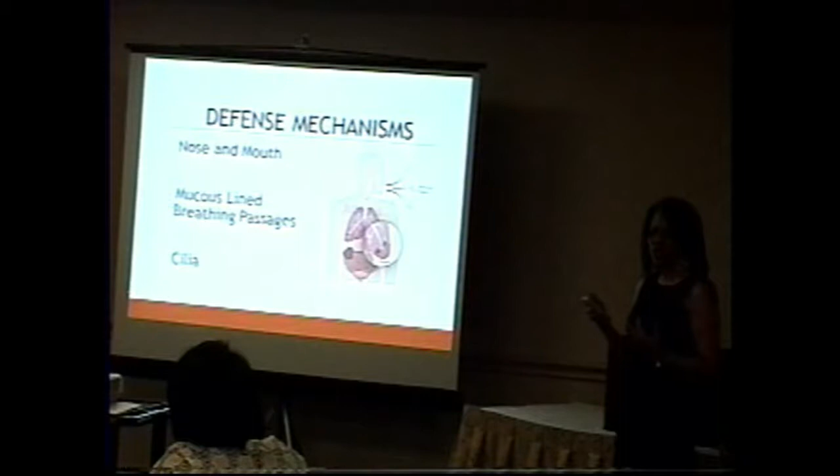Defense mechanism - what things are there in our bodies that protect us, what defense mechanisms do we have from asbestos? Our nose and mouth, the mucus lining the breathing passages. So the cilia in our body protect, but just think about it - when you're breathing and the fibers are very tiny, if you think about one strand of your hair, that's very small, isn't it? So you can't always see it, but if you're breathing it and it attacks your body, the different passages of cilia in your body can only protect up to a certain point.

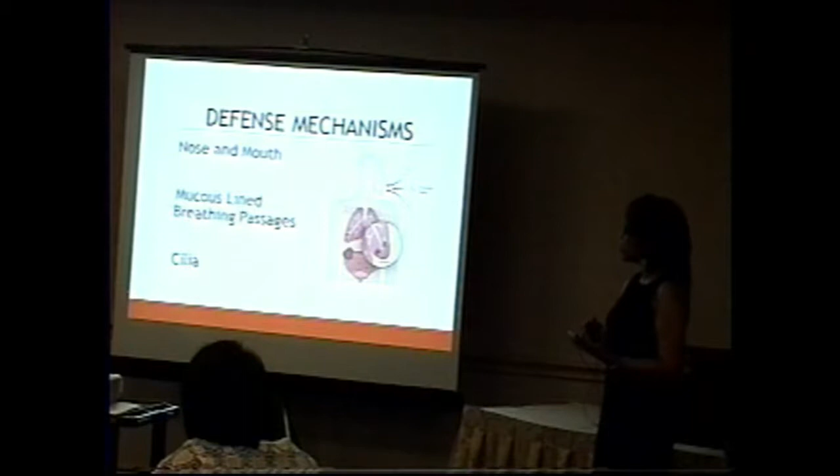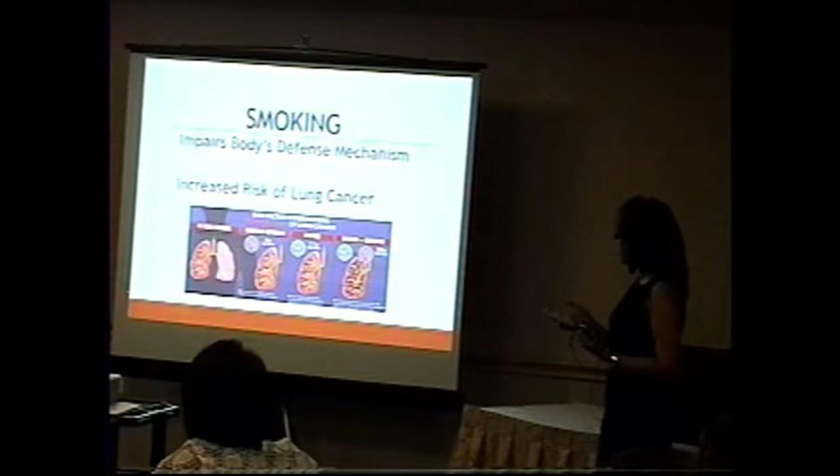When you breathe it, it affects that cilia, and sometimes it numbs it. So if it has that numbing effect, then it's not doing what it's supposed to do. We talked about smoking - it impairs your body's defense mechanism and increases the risk of lung cancer.

Suspect material - this is kind of geared from the contractor's perspective. If in your building you have not had an inspection conducted, which you should, the first thing you should do before you start any work is make sure that it is inspected, because you don't know what suspect materials might be present.

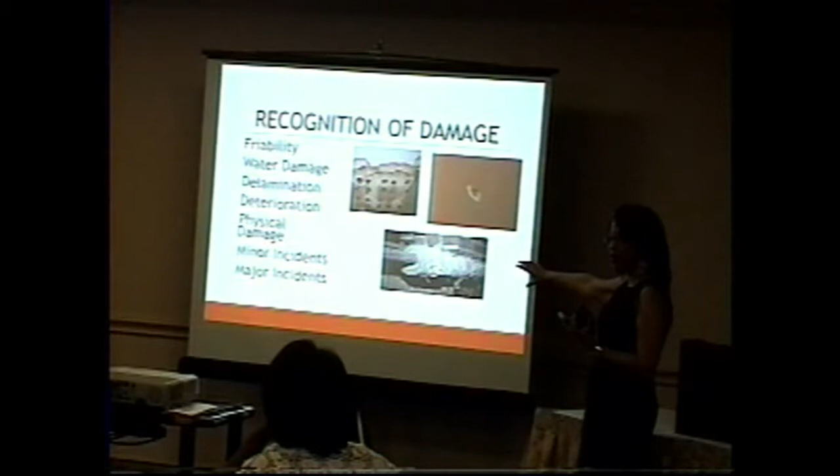Piping, this is another type of piping. When you see that insulation on that piping looking in this state, then if you touch it, what's going to happen? It's going to fall to the ground. You're making it friable. So remember, if your maintenance guys are coming in, or a handyman perhaps doing some type of job, you don't want to expose them, because you're exposing the workers, you're exposing yourself, you're exposing the children.

So friability is key. Water damage: if you have water damage on your floor tile, and I'm going to show you some other areas, any type of deterioration, physical damage, any incident, just be aware. 1978 is your target. So if you have a building, what's the age of your buildings? Is it older than 1978?

Oh, I'm thinking lead, aren't I? Yeah, I was just, I'm gonna say, thinking lead. Look, I'm thinking lead. You're right. You're right.

Basically what she's saying is there is no date after which you can assume that your building is asbestos free. That's what she was indicating. So even a building built in 2008 could, in all likelihood, still have asbestos products in it.

By the way, I am also a contact for asbestos. He is, and you know, Mr. Kelly is very knowledgeable and a wonderful source of information. Because even though he's in the lead division right now, he actually wears both hats. I think you wear all hats. So if there's a lead question, if there's an asbestos question, if there's a mold question, he is a wealth of knowledge.

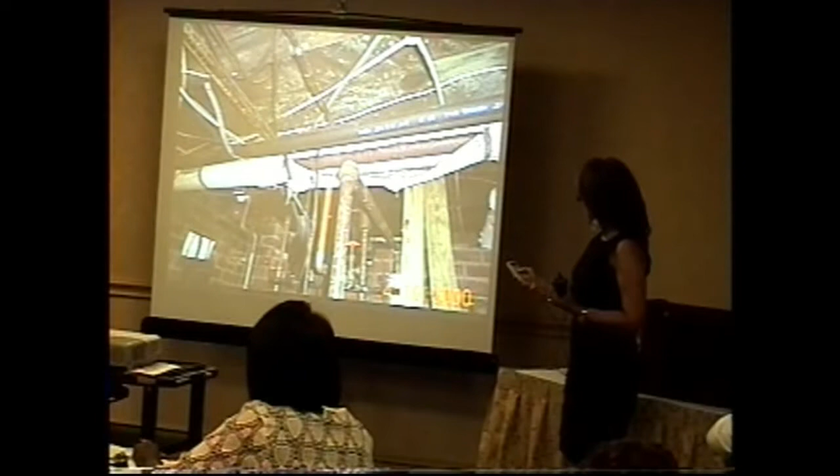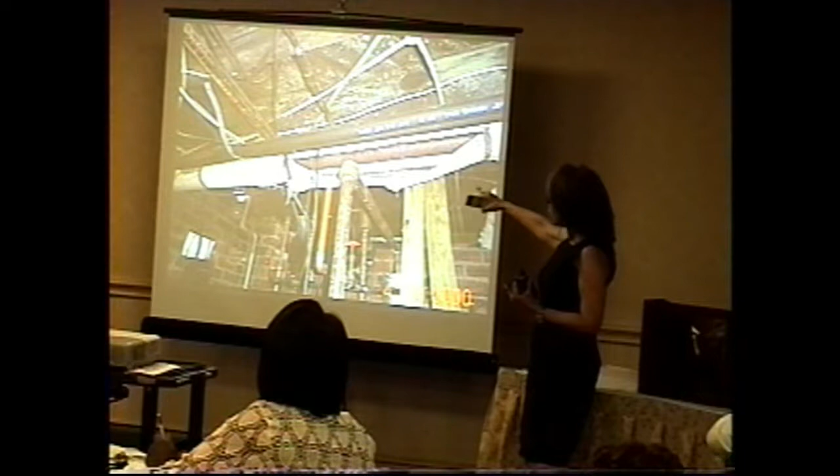This is a clearer picture of what I showed you earlier. Many times when the ceiling tile is there, there's glue. They added glue to make it stick so it doesn't come off, but over a period of time it will break. So usually, all of these pictures are suspect material. Again, another pipe, a metal pipe with a wrap. And many times if you see insulation, sometimes they may have foil on the back. That's a good indicator that it is asbestos as well.

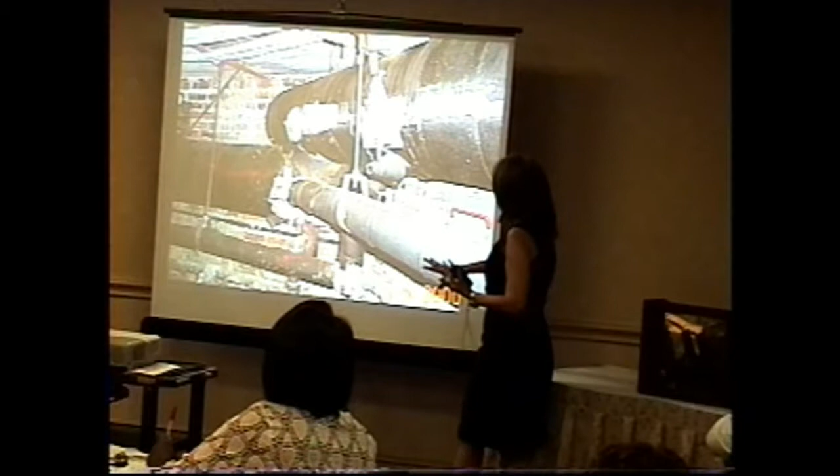Tanks, if you have like a boiler room, this is the pipe and this is the tank. Sometimes the coating on the exterior of those tanks contains asbestos. So if you decide at some point you want to have this removed, you want to take preventive measures.

And these are just different. Sometimes rubber, we see rubber. We think that rubber may not contain it, but sometimes the rubber is the exterior while inside is a different material that makes it up. This is another just insulation.

Floor tile. Do any of you have 9x9 floor tile? Do you have floor tile in your buildings? Probably you do, don't you? Either carpet, floor tile, or linoleum. Just concrete, any kind? Probably not because of the children. You want something else, okay.

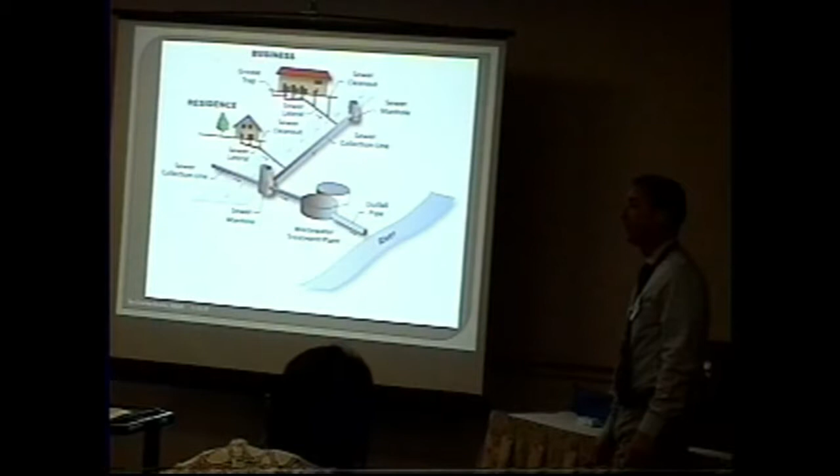If you hear the news, sometimes you can hear a lot of overflows and things like that. Some of that sewage does go untreated, millions of gallons sometimes.

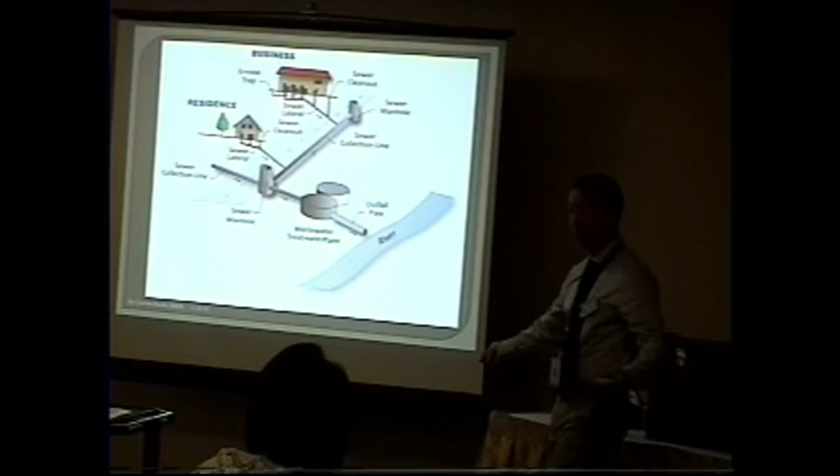If you have an individual on-site wastewater system, the treatment and disposal process is taking place on site. So if you think about all that, collection lines, manholes, treatment and disposal, that's all confined on your property if you're not on a centralized wastewater system. So there's a lot of things going on.

Just to give you an idea, this could be a house, a residence, a daycare, a little shop or retail store, whatever. Toilet, sink, bathroom, whatever, it's got to go through treatment, some type of collection. Everything comes out. A lot of folks get familiar with that clean out. It's very close to the property, at the back or on the side. And if you see that and some type of partition of a tank nearby, you probably have the on-site system, especially if you're not paying a sewer bill.

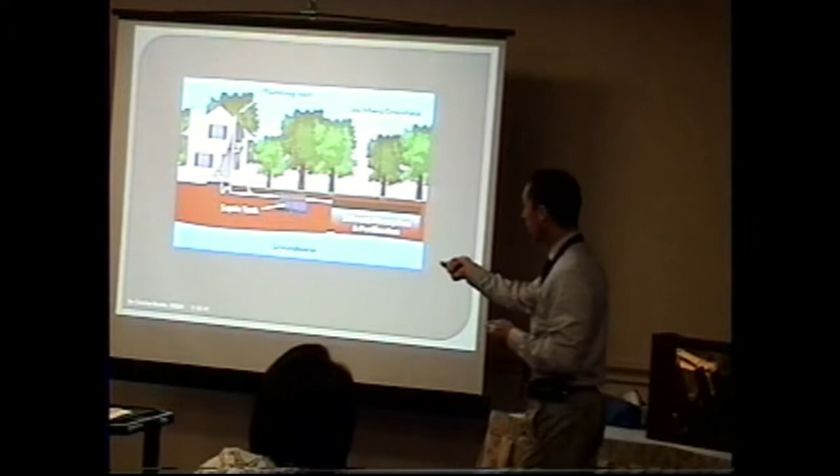So you've got to treat it and do something with it. That's the hard part. We can collect the wastewater all day long, let it do its thing, and then we've got to figure out what we're going to do with it. That's what the environmentalists do for the state of Mississippi. We study the soil and make these determinations, designing this based on design standards in our regulations. We don't just have a rule book and say you need a 1,000-gallon tank or whatever. We've got to figure that out on every site.

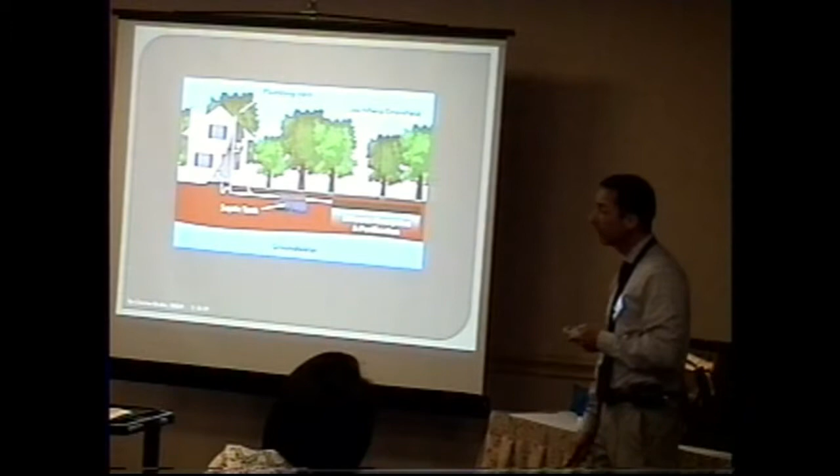That little pipe you see sticking up, what is it for? That's just a clean out. It serves a purpose for clearing anything that comes out, like tissue or grease, that builds up and accumulates over time. It's typically not right up close to the surface, it may not be as high, but it's usually a 4-inch pipe, sometimes 3-inch. You might see a 6-inch in some areas if it's larger.

All right, here's a question: what happens after we flush the toilet, take a shower, or wash clothes? It goes into the tank. It's got to do something, right? Out of sight, out of mind is a common attitude we have. I've lived in both situations, paid my sewer bill, and you don't think about it until you've got a problem. Well, the wastewater has to go somewhere, and my question is, where do you think that somewhere is?

Somewhere starts with treatment. The pictures I showed you, that's the definition of an on-site system. I'm going to talk about on-site systems from here on out. You've got a septic tank, or you've got a treatment system, an advanced treatment system. That's the term used in Mississippi. It's commonly referred to as an aerobic treatment unit or a treatment plant. You may have heard some of those terms before.

These are tanks buried in the ground that hold wastewater for treatment, typically installed within 5 to 10 feet from the dwelling or building. That little clean-out pipe is relatively close to the building, at the side or back. The tank should be very close within proximity of the building, like I said, 5 to 10 feet.

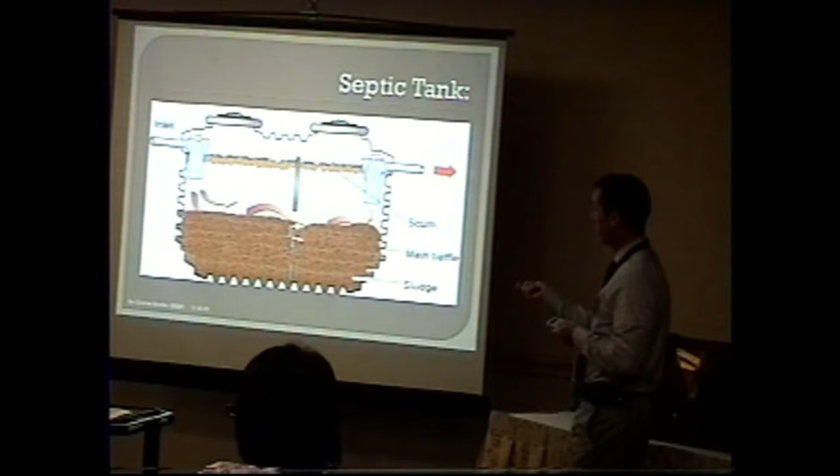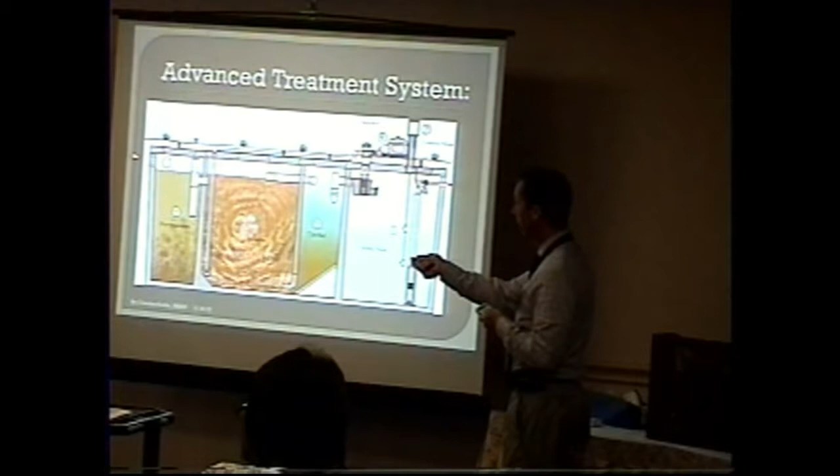An advanced treatment system, again, is an on-site system for treatment. You got a septic tank or you got an advanced treatment system. This is, if you notice, just basic, a lot of things going on here, as you can see. Pre-treatment, wastewater coming in, same principle, waste coming in, there's a side drawing. Waste coming in, pre-treatment, aeration zone, clarifier kind of settles it out.

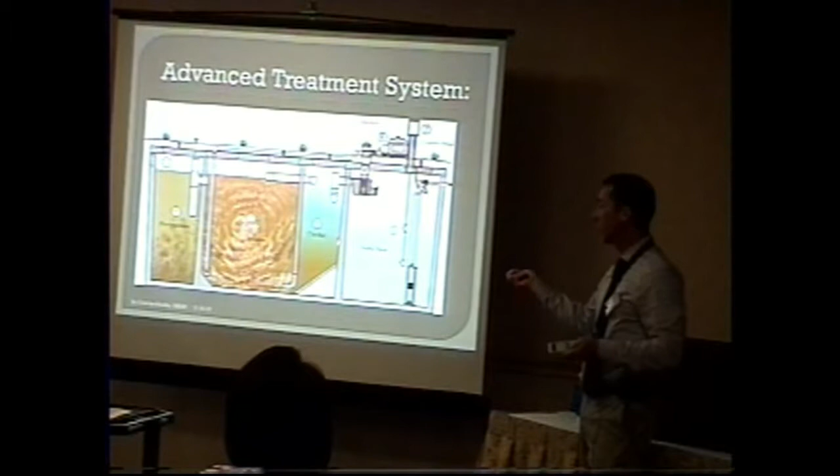You see how it's getting a little bit clearer and clearer? That's still got waste in it. You disinfect, you got a pump chamber, there's your aerator motor and your control panel. This has electricity. Anybody ever had kids with an aquarium at home with little fish and little stones with the air bubbles? Same concept, but a little bit more sophisticated. You're introducing air into that. You're speeding up the process.

That was treatment, okay? Again, we're dealing with an on-site wastewater system, that whole process. That's a very quick overview of treatment, septic tank or advanced treatment system. And I told you about where it's located at, within 5-10 feet of the house, by that clean out, and some of the processes that take place.

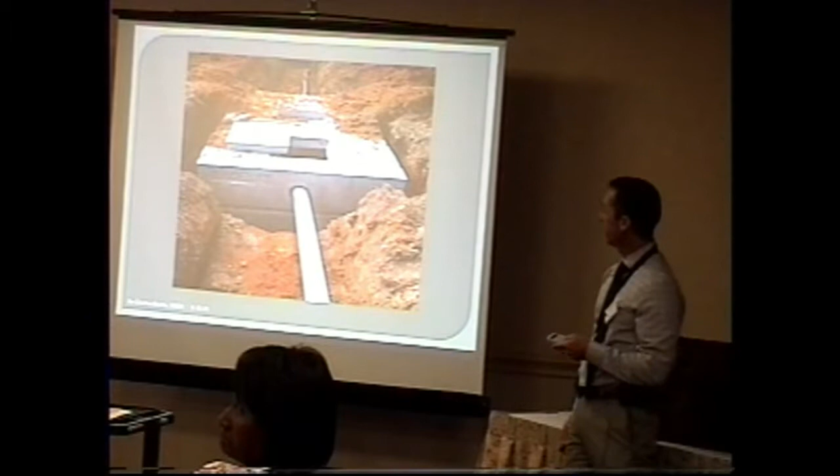There's a septic tank, a concrete one. That's typical—looks big once it's out, but there's one going in. This is just for a house or a trailer, waste going in, waste going out into the field line. This is one that has risers.

We just had a recent regulation change as of last November requiring risers, which may help identify the tank in the future since all these tanks are buried—you don't see anything, and there are a bunch of old ones. So now, since November of last year, a new rule requires that you can see this lid. It's got to be visible.

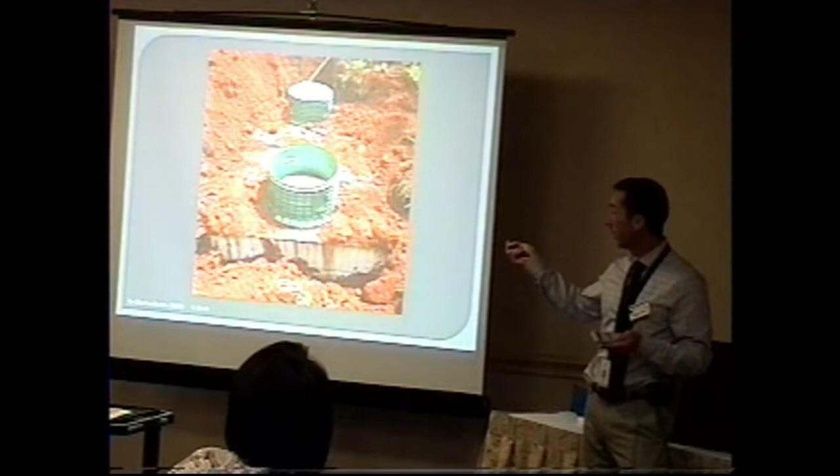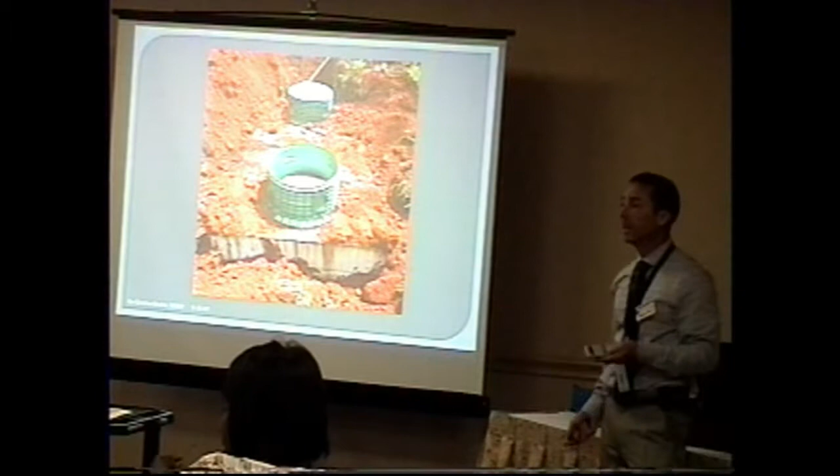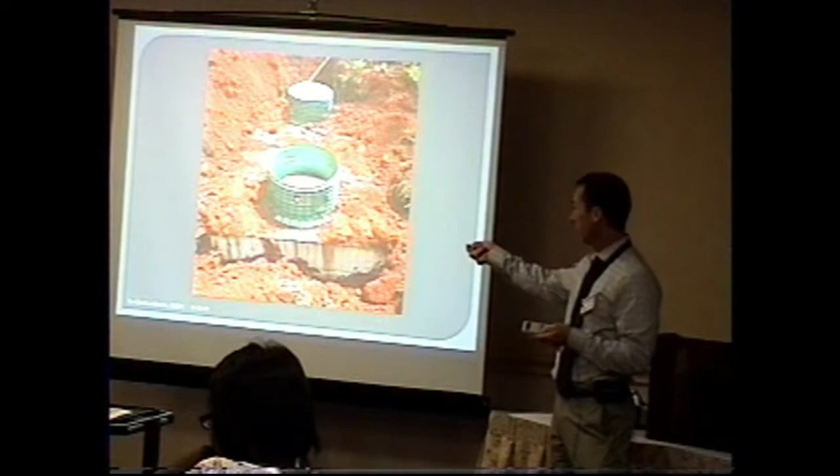Maintenance is an economic factor. We kicked around many different ideas with this, and we had an advisory council. The way it was described to us: if you have a septic tank at home and need it pumped out, if that guy has to go grab his shovel, he'll charge you about $40 on average to dig that little lid up 6 inches underground. That's why we wrote the rule, to get homeowners to know here's your system, have you had it pumped out, here's access to it. It makes sense because some of the openings are smaller and some people just don't do it because they don't have access to the unit.

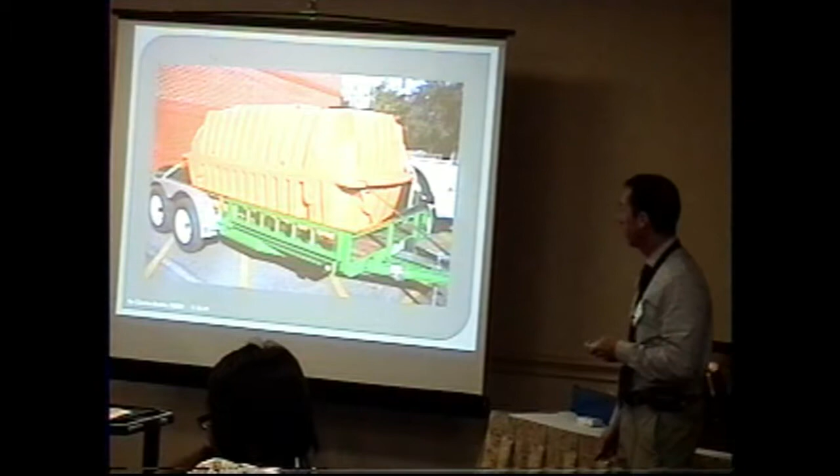Poly tanks come in different sizes and shapes. These are all registered products. We register all these. You can't just have a tank put in the ground. We tell you how big it's got to be, how to build it, and how to register and label it, the whole nine yards.

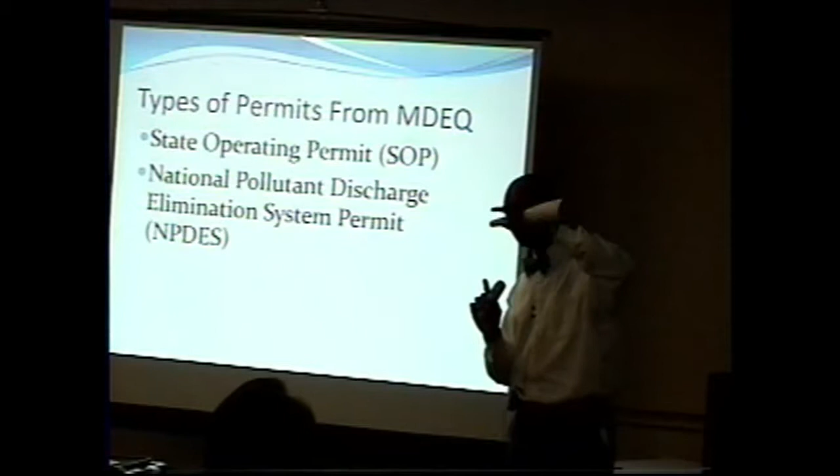The health department cannot help you in that case. The State Operating Permit, what we call SOP, can vary between the health department and us depending on the size, and depending on if the health department wants to take you on. So those are the two types of permits with DEQ that you'll basically see if you have to go through DEQ: the State Operating Permit, SOP, or the National Pollutant Discharge Elimination System Permit, NPDES.

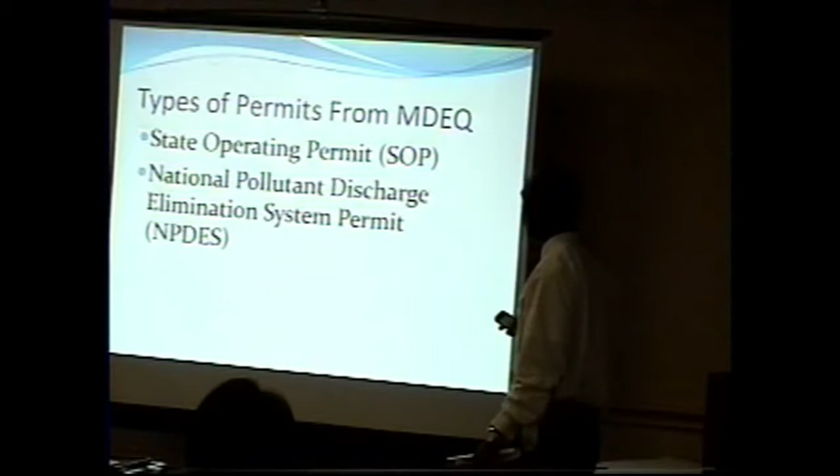Alright, basically we'll start with the State Operating Permit, or SOP. This is a non-discharging system into state waters - land application, like how Mr. Charles stated in the last presentation, discharging basically via the ground, via spray field drip system, or etc.

The ATU system, which is installed by a proper installer, also has to be checked. This is in the permit that you all will receive if you have to go through DEQ - it's basically the regulations, almost your Bible of what you have to do for your system. So it has to be checked by a certified wastewater operator, Class 2.

You have Class 1 to Class 4. Class 1 is basically - I don't know if your towns or facilities, as far as a centralized wastewater treatment system, have a lagoon, that's a Class 1. Class 2 is more technical, with more mechanical parts. So Class 2 to Class 4 can actually run your proper system.

If you have an SOP, maintenance personnel has to at least visit the on-site system at least twice a year, once every 6 months.

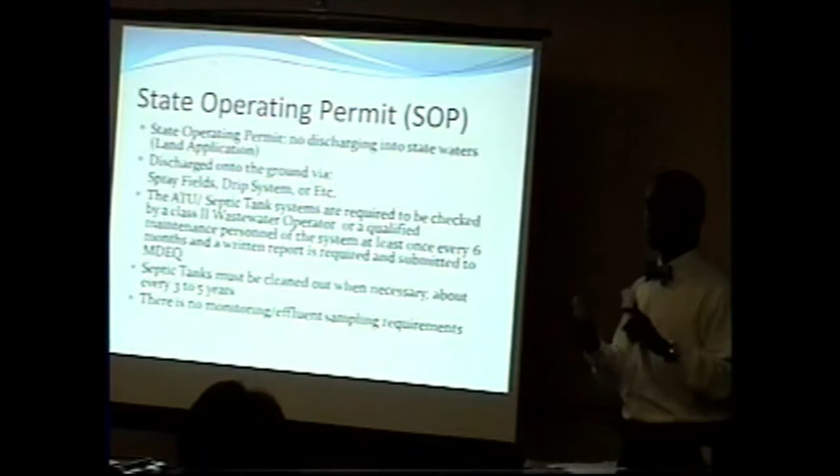Has to have a written report sent to DEQ every 6 months. It's required, it's in the permit. Also, septic tanks, like Mr. Charles stated, have to be pumped out at least every 3 to 5 years. It's in the permit, it has to be done. We're going to want to see paperwork submitted for that also.

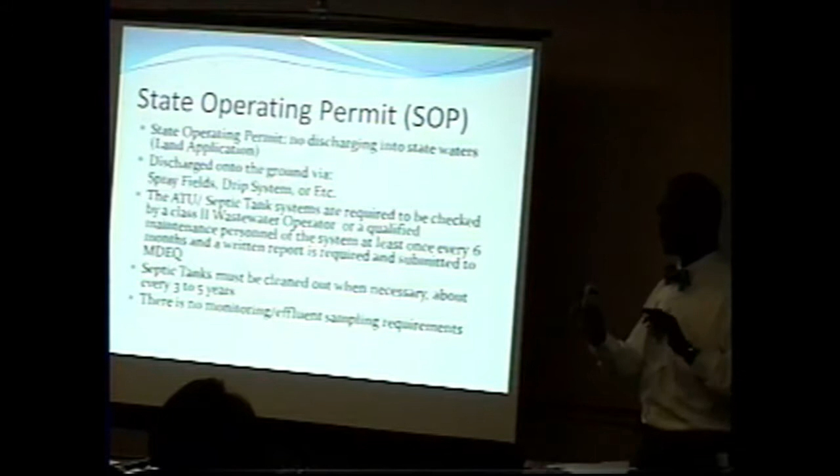For the SOP permitting, there is no monitoring or effluent sampling required. This next permit I'm going to talk about has effluent sampling requirements in it, but as far as the SOP, you don't have to hire anybody to pull effluent sampling. You don't have to get a contract lab to test your wastewater. Basically, everything is on site.

National Pollutant Discharge Elimination System, or the NPDES program.

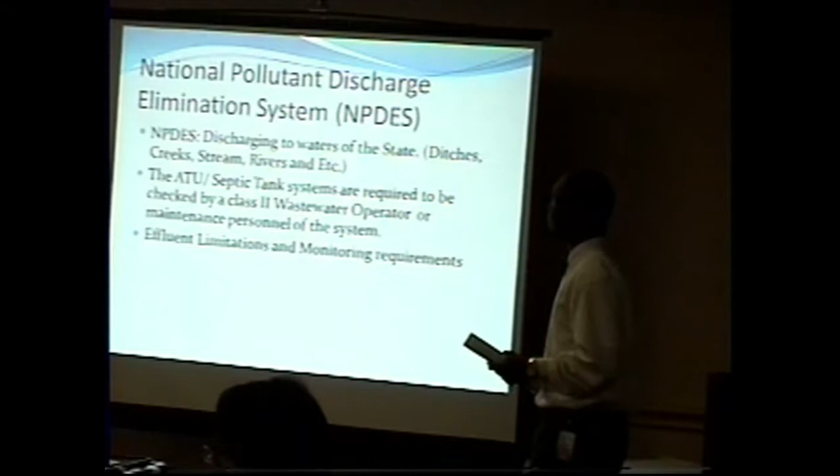NPDES involves discharging to state waters. Basically, you discharge to ditches, creeks, streams, rivers, etc. The ATU systems are also required to be checked by a Class 2 operator or maintenance personnel of the system. So it doesn't have to actually be a Class 2 operator, but if that person operates and is certified and has enough knowledge of the actual system, he can run the system for you.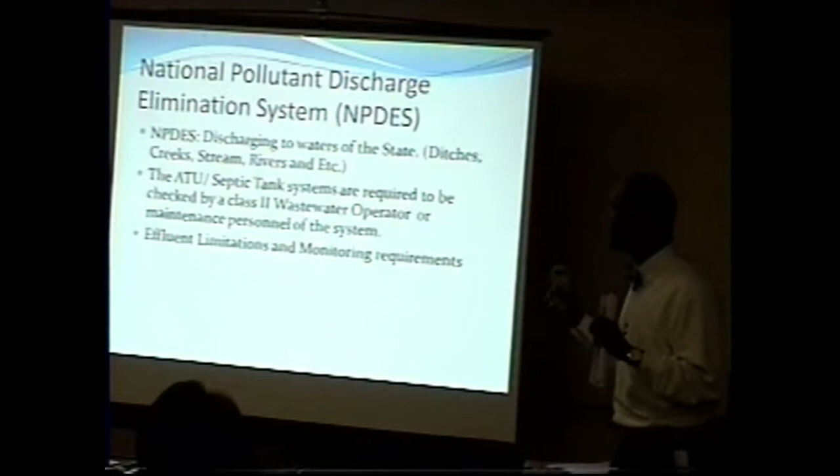This particular permit has effluent limitations and monitoring requirements. If you have this type of permit, usually this is what you're going to see in there. You have effluent discharge limitations now.

Basically, these are some of the major parameters you will see in your permit: chlorine, fecal coliform, flow, biochemical oxygen demand 5-day, pH, and total suspended solids.

These numbers right here are from a daycare facility out of Alcorn County. I just pulled this out to show you. But these numbers can vary depending on the stream you are discharging to. These are kind of good numbers compared to what I've seen before, but it depends on where you're discharging to. These numbers can be even lower, which can make the ATU have to be at a certain standard.

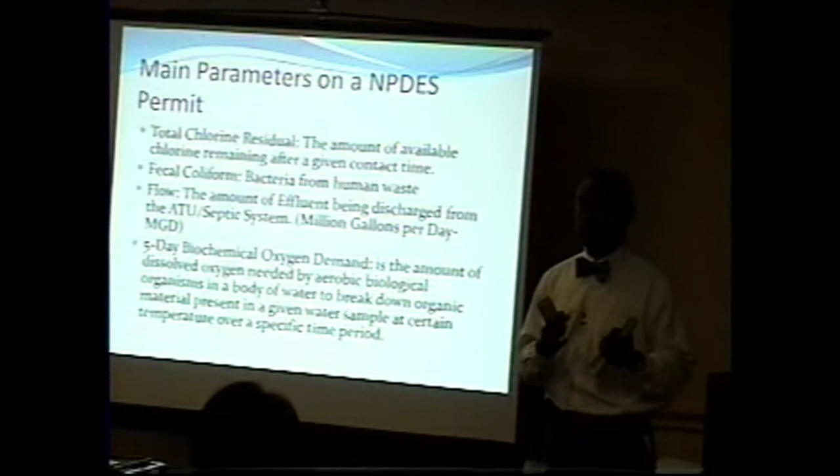Those are the main parameters from the last slide. We have total chlorine residual, basically the amount of available chlorine remaining after a given contact time. So, like Mr. Charles stated in the last presentation, you have to disinfect. You have to kill that fecal coliform, which I'm about to talk about. You have to kill that bacteria. Even though it may be clear, it still has bacteria in the wastewater.

So you have to kill those bacteria before it goes back into the reservoir, the streams, or wherever your receiving stream is. Fecal coliform is a bacteria from human waste. Flow is basically the amount of effluent being discharged from that ATU or septic system, usually measured in million gallons per day.

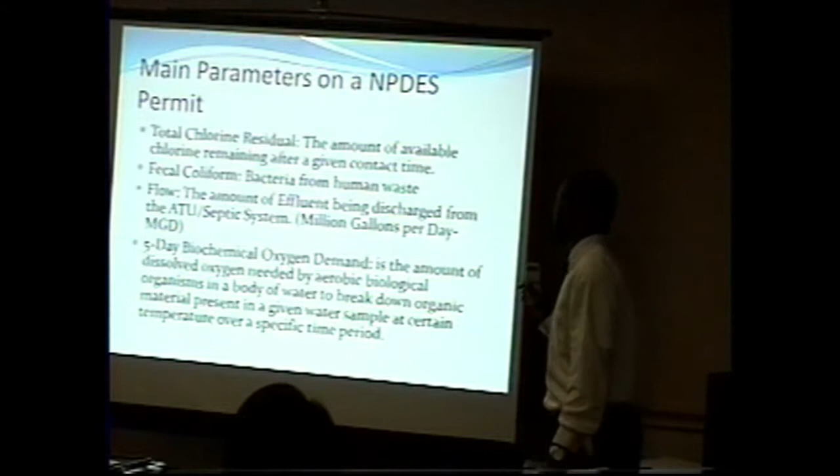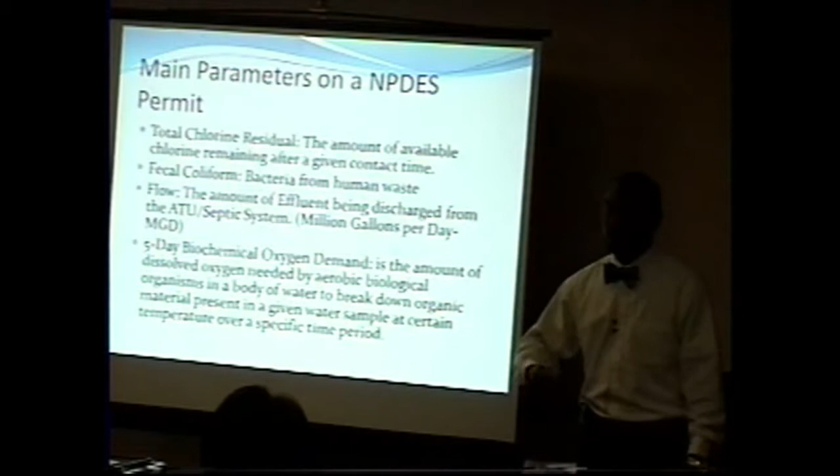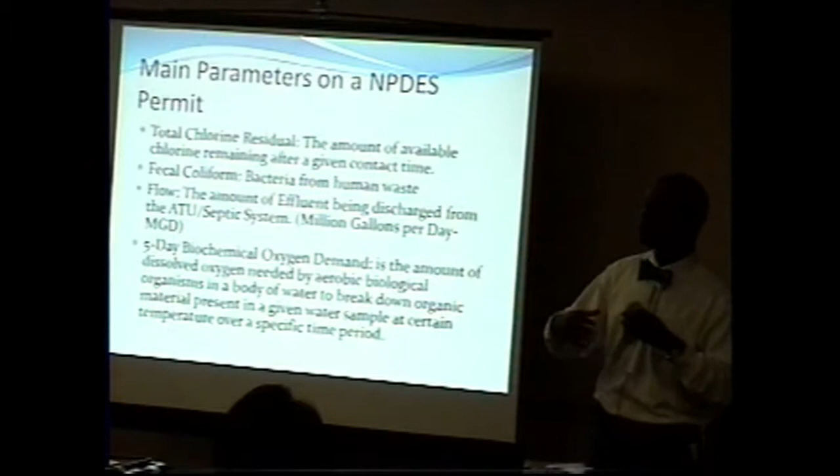We also have 5-day biochemical oxygen demand, or 5-day BOD, basically the amount of dissolved oxygen needed by an aerobic biological organism in a body of water to break down organic materials present in a given water sample at a certain temperature over a specific time period. Basically, the amount of oxygen needed for those microorganisms in the wastewater to break it down. That's all it is, because those biological organisms in the waste need a certain amount of oxygen to do what it needs to do to break down the material in the septic tank or the ATU.

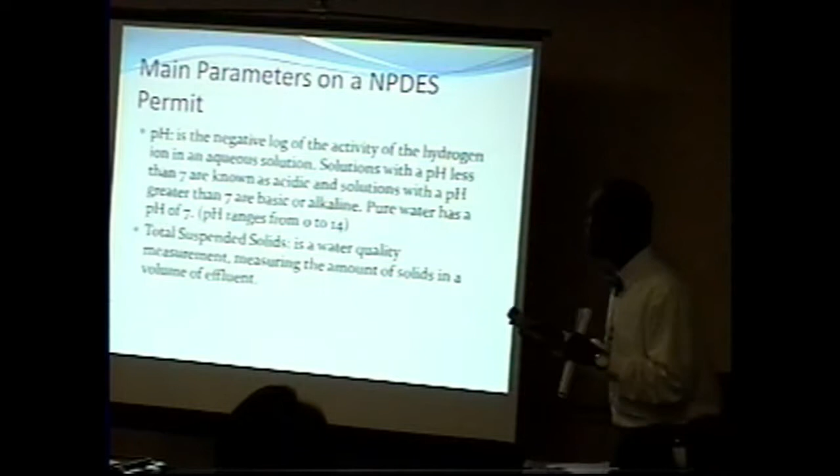pH is also another parameter. It's basically the negative log of the activity of hydrogen ions in an aqueous solution. Solutions with a pH less than 7 are known as acidic, and solutions with a pH greater than 7 are called basic or alkaline. Pure water has a pH of 7.

Total suspended solids is basically a water quality measurement, measuring the amount of solids in the volume of effluent - the solids which are coming out. You're going to have some solids come out. I haven't seen a treatment plant or an ATU that doesn't have a little trace of solids. You're going to have some.

Really, the ATUs and these treatment plants are discharging, even though they are under the limits. Basically, the treatment plants, ATUs, and septic tanks help the environment by speeding up the process of treating this sewage before it actually hits the environment. Then the environment basically breaks it down on its own, because the environment can do this on its own, but it will take time. If we just directly discharge into the rivers and streams, we can actually kill the environment by discharging it straight in.

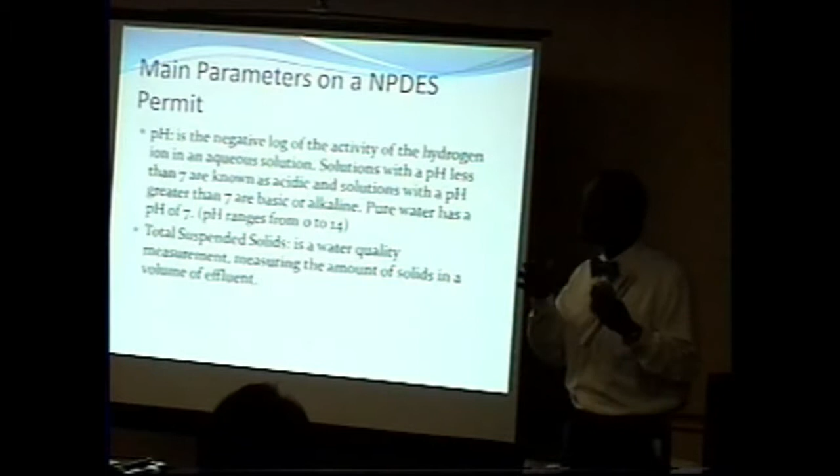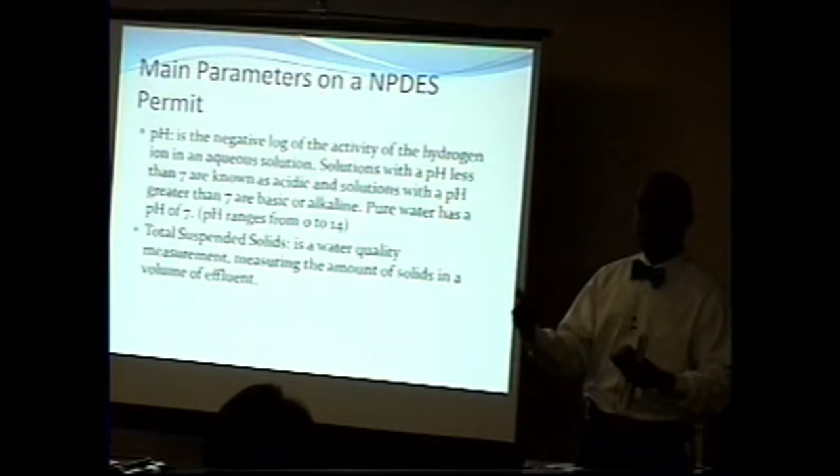But over time, it could take care of itself. So basically, we're helping the environment by speeding up the process, treating it, then still discharging a pollutant. But at that specific point, if it's actually being treated the right way, the environment can handle it and treat it down to where there are no more pollutants as far as the wastewater.

All right, common issues with ATU or septic tank. A significant amount of solids can start to accumulate in the tanks, which can cause issues. The aeration in the ATU may stop, causing the aerobic biological organisms to not break down the organic materials, and kill the organisms. If you don't have enough oxygen in that ATU or septic tank, your organisms will die. Your solids will begin to accumulate more, and you'll probably have issues with backing up, or if you have a spray field or a field line, it could cause the field line to collapse or stop up, causing the sewage not to irrigate properly, which could back up into your yard or house.

So, think about inflow organic materials being greater than what the ATU or septic tank is capable of treating. Like how Mr. Charles Schultz said in the last presentation about discharging on Saturday morning, about 7 loads, washing cars, all that type of stuff. Some ATUs, like he said, are rated for 700 gallons a day, 1,000, 1,200, 1,500. They usually calculate it per person, like 100 gallons per person.

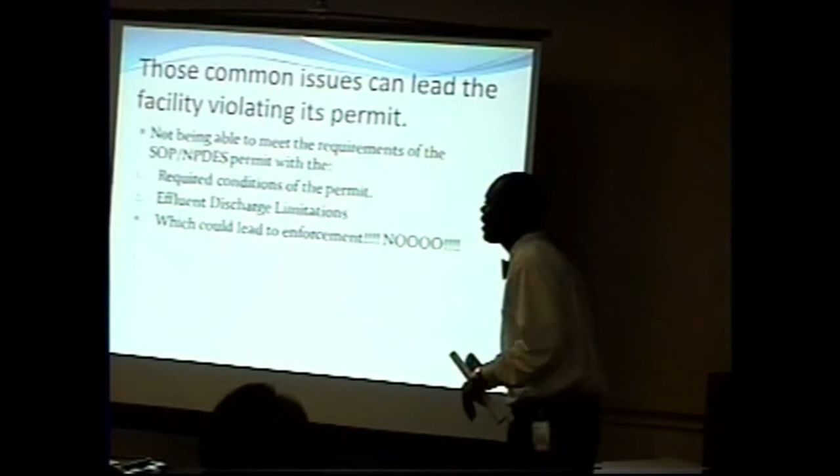That's the last thing I dislike doing, especially when I'm dealing with daycares or small facilities that don't have a lot of money. They're just trying to make money and take care of the kids, and they're not able to meet their requirements. Sometimes it's because they're not taking care of the ATU properly, not getting somebody to do maintenance, which is causing issues with the effluent discharge limitations. They're not meeting their limits.

It broke my heart maybe two years ago, having to bring a daycare in. Why are we bringing a daycare in? Because they were not doing what they were supposed to under their permit. They violated the permit and had to pay a penalty. It was a significant amount for that facility because they were a private facility that did not have a lot of money.

Can you let me know what the penalty range is for a violation? It depends on the size of your effluent discharge. It could vary. For smaller facilities, the least is probably $1,500, but that's per day per violation normally for state. If you want the technical number, it's actually $25,000 a day, per violation. But we kind of slim it down for DEQ purposes.

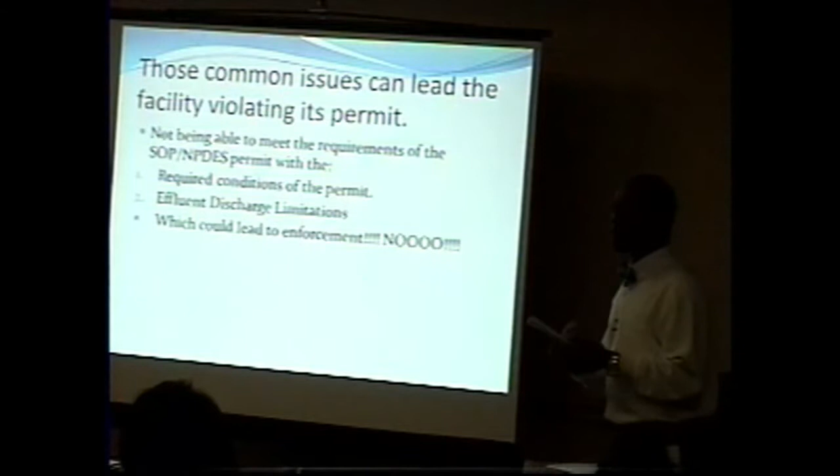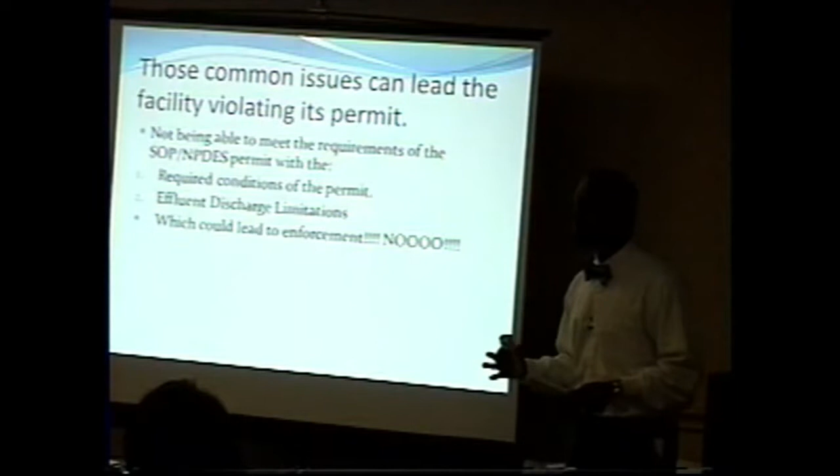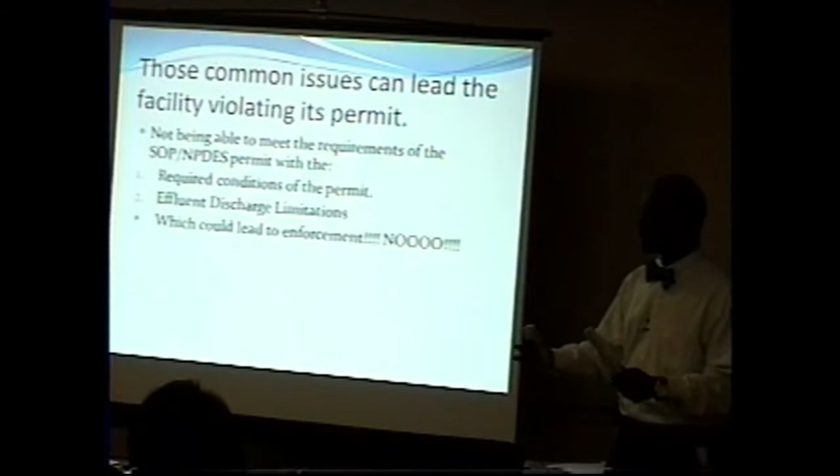We will go out of business. Yeah, that's what I'm saying. That's why it breaks my heart when I see small facilities. You all are really not in the business of doing wastewater treatment. Y'all have to do it because maybe y'all are in rural areas, so there's no centralized sewer that will take your waste. So you have to do it on site, and that kind of hurts my heart.